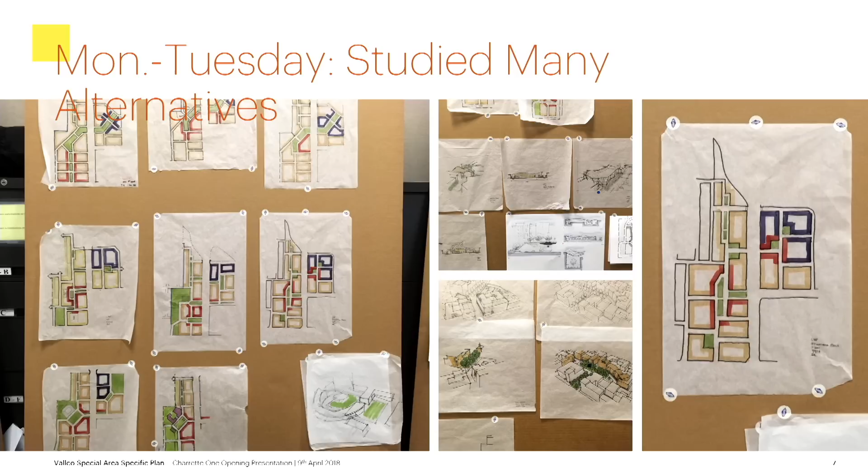Monday evening from 6 to 7:30, we started with the kickoff presentation and the breakouts. On Monday and Tuesday, if you dropped by the studio, you saw the team rolling up their sleeves, putting pencil to paper. We generated dozens of framework alternatives, different types of public spaces, a number of drawings just to get ideas down on paper and to get the team thinking, and to have some ideas for you all to react to as you walked through the design studio.

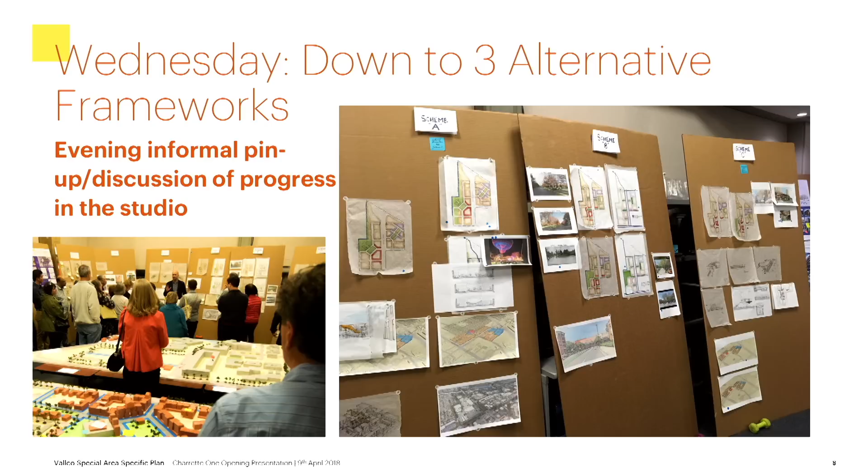Then on Wednesday at 6 o'clock, the team had whittled down those dozens of concepts to 3 different alternatives. For those who attended that Wednesday pinup session in the studio, we walked the audience through those 3 alternatives and their different elements. The studio was a little bit tight - the model takes up a good chunk of the studio - but it was a really good dialogue on Wednesday, and we got some really good feedback once again.

Mentioned the topic-specific deep dives, or the brown bag lunches. Ben Sigmund did the Tuesday brown bag on economics, and Steve Lawton was there to talk more about retail. Hugh Louch from Alta Planning did the transportation brown bag on Wednesday, and Tony Perez from Opticos did the form-based code presentation on Thursday. I believe all of those have been uploaded onto the project website - I've actually seen them playing in the vestibule on the TV over the last several days.

So I do encourage you to take a look at those if you haven't already. Then there's the open studio conversations, and I think this is one of the real benefits of the charrette process - we bring our team here, set up our design studio, bring our computers and drawing utensils, and it's a really active, vibrant, energetic environment. It enables us to make really good progress over a few days and interact with you, getting more feedback loops, and interact with our multidisciplinary team and get feedback loops completed with them as well over the course of the week.

Every day we uploaded quite a bit of content onto the project website. If you're signed up for the email, I noticed I was getting that every morning, looking through that list of stuff - I think that was great to see. I know there were some comments early on that the website was a little bit stale in terms of content, so I'd say there's probably plenty of content on there to keep you busy for a few weeks, until we get to that next charrette, or at least start thinking more specifically about that.

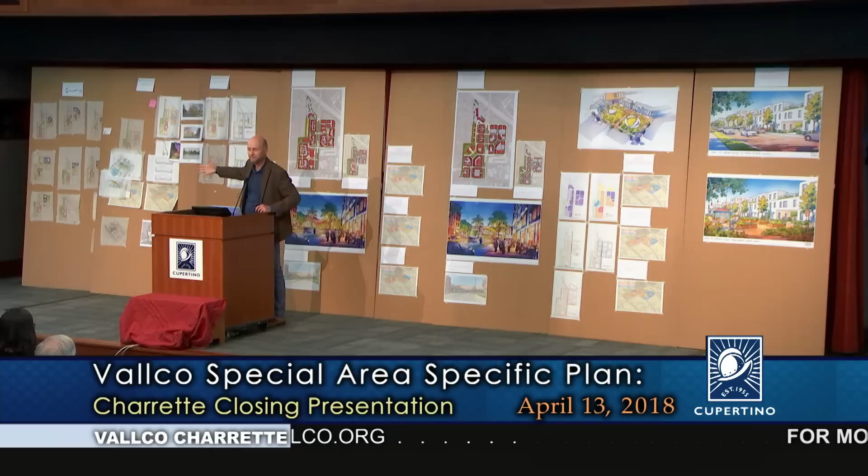Behind me to your left is somewhat of a chronological process that happened in the studio, with the rougher plan drawings on trace paper where you might see several layers taped on one another that we integrated over the course of the week. The boards here with the brightly colored drawings are the ones we've generated in the last day and a half to clearly represent the two different alternatives I'll talk with you about tonight.

The first concept is a pretty basic one: making the streets more pedestrian and bicycle friendly. That's shared across the two schemes. It's a pretty basic concept, but I wanted to continue to reinforce it, since we heard a lot about the importance of connectivity, walkability, and bikeability.

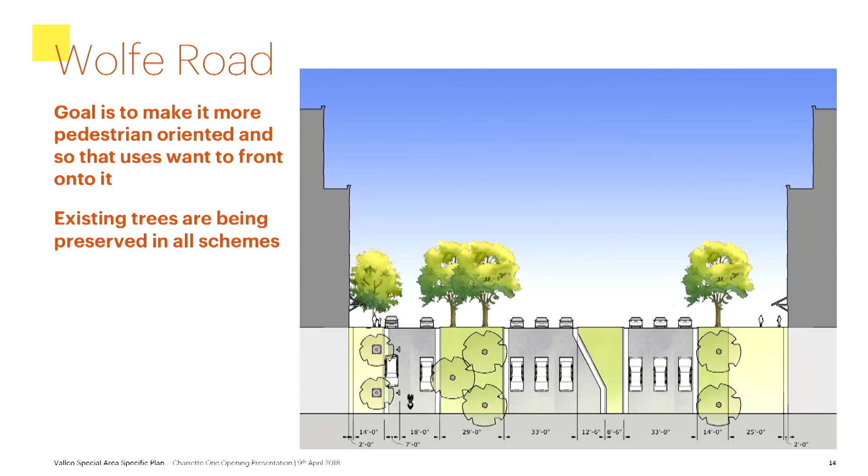Just as one example, we're looking at Wolfe Road and thinking about how to make it a much more inviting street to walk along—how do you make it the type of street a business would actually want to front onto, as opposed to back onto? If you've been to Santana Row, everything's really internalized; they gave up on the outside streets and turned their backs to them. We think it's a much better idea to create a gateway and an identity for the project that orients onto those external streets as well.

One idea is to introduce a local travel lane on the western side, similar to cities with multi-way boulevards like Paris or Barcelona, or Octavia Boulevard in San Francisco where they tore down the freeway. It has that local travel lane while still having through traffic going in the middle—a great way to create a beautiful street that people will walk along and businesses want to orient on, without impacting the flow of traffic through the area.

The second key concept is very thoughtful transitions into the neighborhoods. This is something we've heard over the course of this project, and it's important for the neighborhoods in particular. I want to say there's absolutely no intent in this process to take the wall down unless that's something the community really supports and pushes for.

We're also protecting those rows of trees along that edge. I'm hoping that if that's not done initially, such a great place is developed here that you all think twice about wanting that punched opening through there to enable walking to the great amenities in this project area. We've heard varying viewpoints, but right now we're just saying let's let the community decide what they want to do with that.

This is just a view, and you'll see this when you go take a look at the model in the studio. The idea is that there's a very careful and thoughtful transition from the biggest buildings, mostly at the northeast corner, scaling down as you move across the site to basically the west and southwest.

The majority of our schemes, if not all of them, have 3 to 4 stories at that immediate western edge, and we can still achieve the program by scaling up the buildings as you progress away from that neighborhood. This is a view of that scale of development—the residential, new housing closest to the Blaney neighborhood.

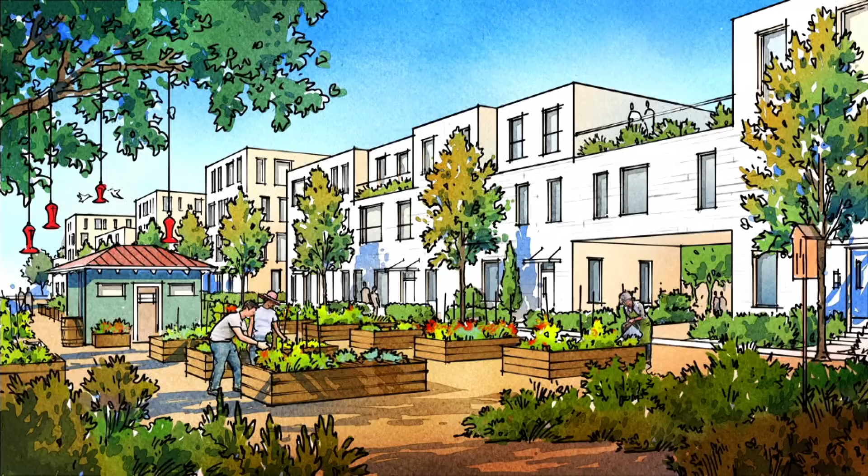That's a view with housing fronting onto the perimeter road. There are some alternatives where the houses bump right up to where the current perimeter road goes, and another set of alternatives where the housing orients onto a larger green open space. This is a conversation we need to continue—one trade-off for more at-grade open space is that we'll likely need to bump up buildings at some other part of the project in exchange for that area becoming open space. That's a good dialogue for us to have as we work through this process.

There's a series of programmatic elements. I don't want to sound like a broken record, but I want to reinforce that there are things the community said we absolutely want that are existing—the skating rink, the bowling alleys, and a movie theater—that have been a constant theme here. So we're integrating those uses.

A lot of this will involve back and forth between now and the second charrette, at the second charrette, and after it, with our team working with the Sand Hill team to figure out viability and the community's desires, and you all prioritizing which of the benefits you'd like to exchange for elements within the plan.

Some creative thoughts that have come up over the course of the week: several people brought up the idea of how does co-housing integrate into the project area. That's where you might have a shared courtyard with a group of friends, purchasing a series of housing units with shared space, maybe a shared kitchen, maybe ultimately shared medical care. We're not thinking that carefully about program right now, but those are ideas we'd like to continue moving forward with.

This percentage of affordable housing - 50% of the housing in the SB 35 scheme would be affordable at different levels. That's actually a pretty neat thing, to have 50% of housing affordable.

Where will the affordability dial land as there's back and forth in thinking about overall program and public amenities? That's going to be talked about very closely and carefully, quite often, over the remainder of this process. Several people asked what about affordability for groups that haven't been discussed to date? I think it's really affordability in a broad spectrum, from the upper level to the most lower levels. We'll continue talking about that.

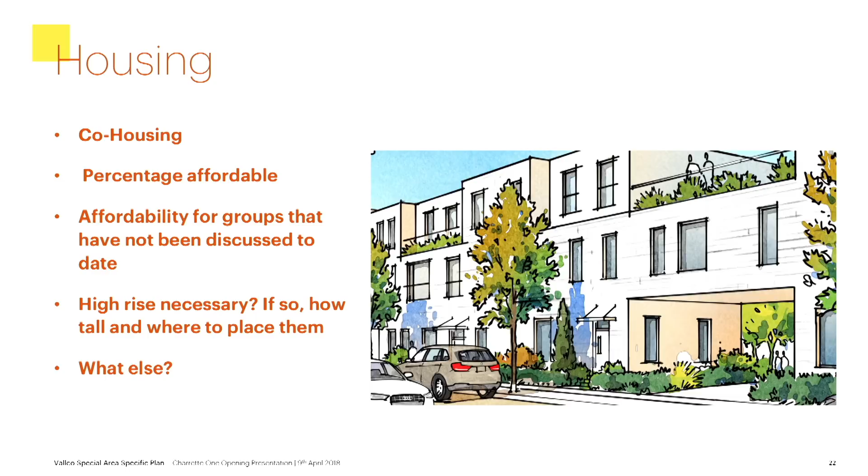The high-rise housing - I think it makes people a little bit anxious. It's something new for your community. If the SB 35 proposal is showing multiple high-rise residential towers, the ultimate question is going to be whether they're happening, but probably more so where they're happening, and a back and forth of public amenity versus size versus location versus the number of them.

So I want to put that on the table. There's no decisions being made. I want to be really open and transparent that the high-rise residential towers are on the table, being discussed, and likely part of that program. There are other things too - I'm sure we've missed some, but we're going to keep thinking about this, and we want you to keep giving us thoughts about it.

Other ideas we'll continue thinking about: multiple entities, community members, and organizations have brought up the idea of an innovation center or innovation hub. Everything from elementary schools, middle schools, high schools, colleges, universities, and businesses in the city could play a very active role in thinking about how we take advantage of the really smart kids here, the great school programs already focusing on these innovation ideas, and ideally pull in local businesses that can support that and play a really important part.

So the first of the alternatives is what we're just calling Internal Square. We kept the names really basic, we just want them to be what they are. So if you were in the studio, this is an early concept drawing with three different layers of trace paper, where the activity for your new town center is focused on an internal square in a more traditional urban pattern. You can imagine a Sonoma Square, a Napa Square, a really more traditional form.

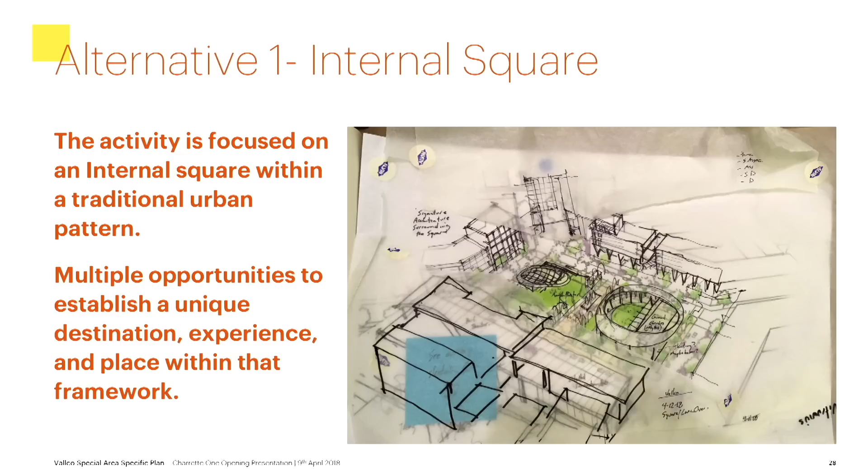But we wanted to also think about within that framework, there's a ton of opportunities, whether it be in the architecture of the buildings or the architectural elements that happen in the square, that could help move that framework and concept forward to a more innovative differentiator. Because if you remember what Steve Lawton said at the retail brown bag, one of the most important aspects of retail is differentiating yourself from the competition. So that's an important part.

I know it's going to be a little hard for you to see these, but on the left-hand slide, the street that goes vertical there is Wolfe Road, and it's Vallco Parkway splitting halfway there. There's a public square at a diagonal. The building on your upper right, at that diagonal, we've heard a lot about - is there an opportunity to integrate a new city hall? Is there an opportunity to integrate a new performing arts theater? So we took that program and said this is one great opportunity to define that upper edge of this new public square, and the other edges would be defined by ground floor retail that would activate the space.

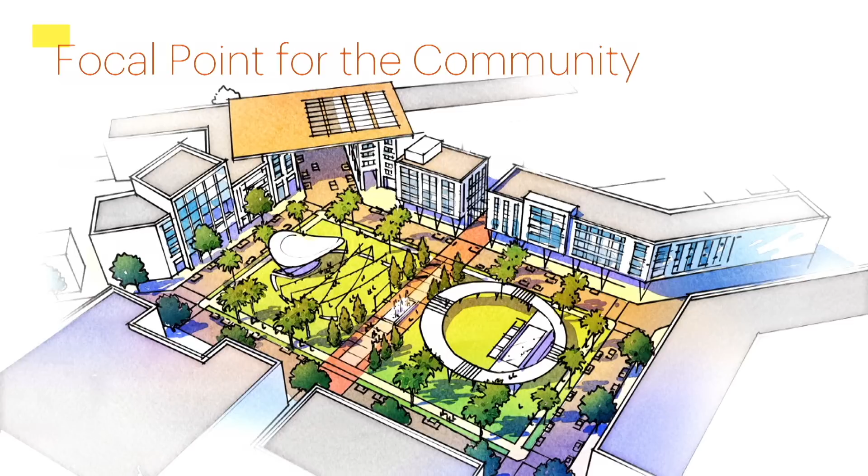This is just a quick aerial view. It's actually a pretty substantial space, so it could be programmed in many different ways based on what the community wants. On your right-hand side, there's a representation of a band shell, and there could be a large outdoor amphitheater that could be programmed as often as possible to activate that new space.

On your left-hand side is just a simple representation of a really well-designed, cutting-edge landscape pavilion. There could be space in there that hosts the Innovation Center, there could be gallery space, there could be council chambers in there as an object - sorry, on the right-hand side, I apologize, I'm flipped around here. So that circle, the big circle, with a little rectangle in it.

What you'll see on the upper portion of this are just the placeholders for that potential city hall and that potential performing arts center. We've looked at several performing arts centers - there's a great one in Mountain View, there's a great one in Livermore. We don't know how big this will be yet; the Livermore one's about 500 people, and I think the Mountain View one holds about 600, if I'm correct. But it could be a little bit bigger as this progresses. Not sure yet, we need to think about that. We studied these spaces, their sizes, and the quality.

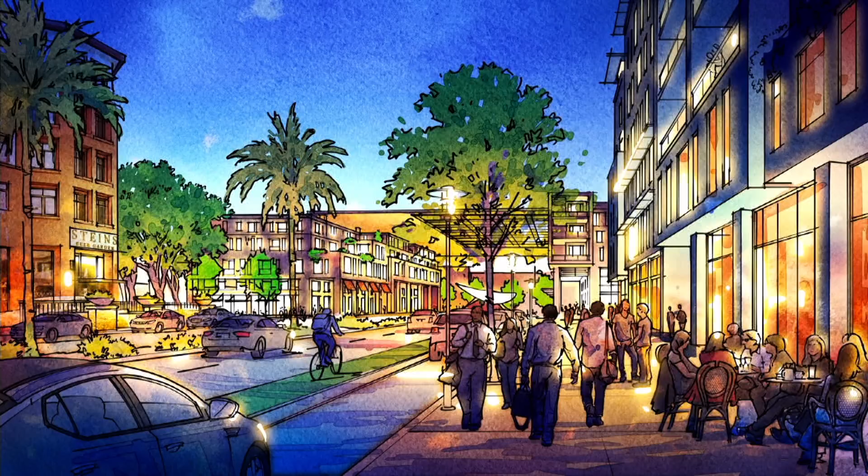Okay, so this is a view looking down Vallco Parkway. Currently, in the existing scheme, you'd be standing on the side of the street that has the parking garage on your right-hand side, and the AMC Theater building would be terminating this view. So the idea here is that we're creating a strong connection by activating this corner of Vallco Parkway with ground floor retail.

And if you cross that street, if you keep going straight across Wolfe Road, there's some sort of signature architectural element that draws you off of Wolfe Road into the new town square, or public square space. So this is just giving you a sense of scale and character, what that could potentially look and feel like.

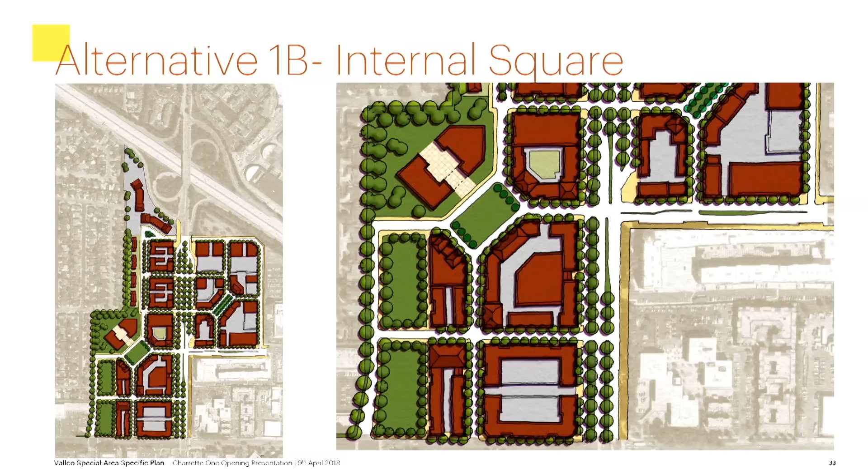Then there's a subset within this scheme which says on the left, the western edge of this project, we're introducing a large linear green space. This is what I mentioned earlier, just saying what if, because we wanted to study that scenario. The rest of the scheme stays exactly the same, just a different interface with that introduction of open space on the western edge.

So we've had questions about program. We have been hastily, over the course of the last day and a half, putting building footprints into those street and block frameworks, and have generated several program alternatives within those frameworks.

Now, once again, this is a work in progress. We're going to study many more of these. But this was our first pass at getting some numbers out there and showing that we could, as a starting point, accommodate a program equivalent to the SB 35 program within this street and block network we're proposing in these two schemes. So that was the starting point.

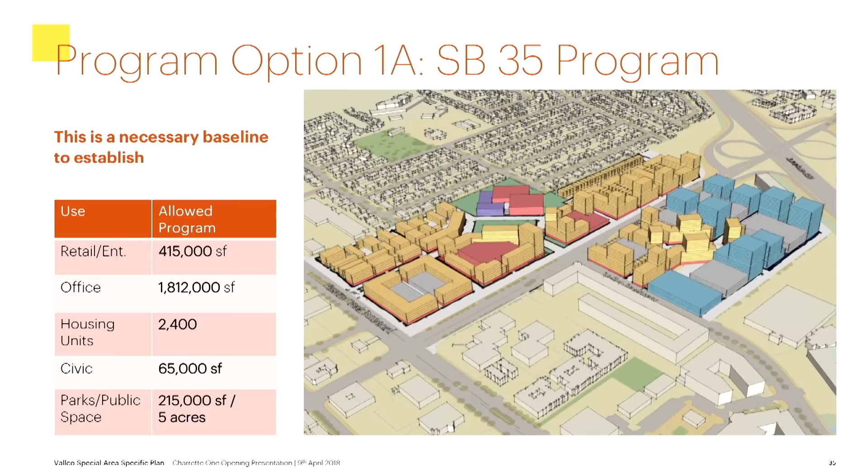The second alternative we did for each of these different frameworks was lowering the office space in the project. The retail program stayed the same, but the office program came down to about 1.3 million square feet. The residential is staying the same, but the affordability requirement percentage is coming down. Those are the sorts of numbers we'll have to work out with EPS and Sand Hill over the course of this project, to understand where those will land in terms of percentages and even the breakdown of that affordable housing.

Civic stayed the same. And once again, this is about 5 acres of provided open space, so there'd have to be a payment of an in-lieu fee to mitigate, to fill the gap between the required open space and the provided open space.

So in the scheme we're calling 1B, which introduces that western green, it's once again at the SB 35 program level. We're showing this because the program stays the same, but when you look more carefully at the massing, there's more height on a series of the buildings because we took it off of the green. I'll encourage you to take a close look at these and ask us questions about it.

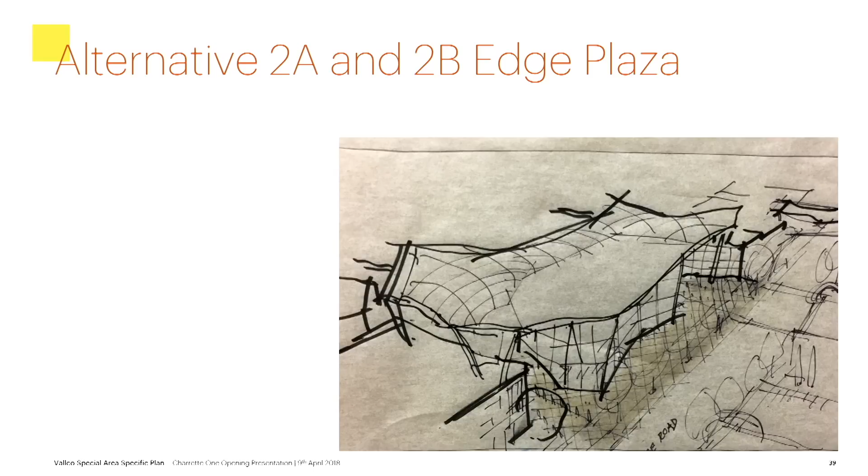So the second alternative we moved forward with, we're calling this the Edge Plaza. This was an early sketch of it, thinking about right along Wolfe Road where Vallco Parkway meets it - some large, we're calling it a retail pavilion, some signature entertainment retail building that's solely retail and entertainment, very iconic, that becomes the core component of the retail entertainment part of the project.

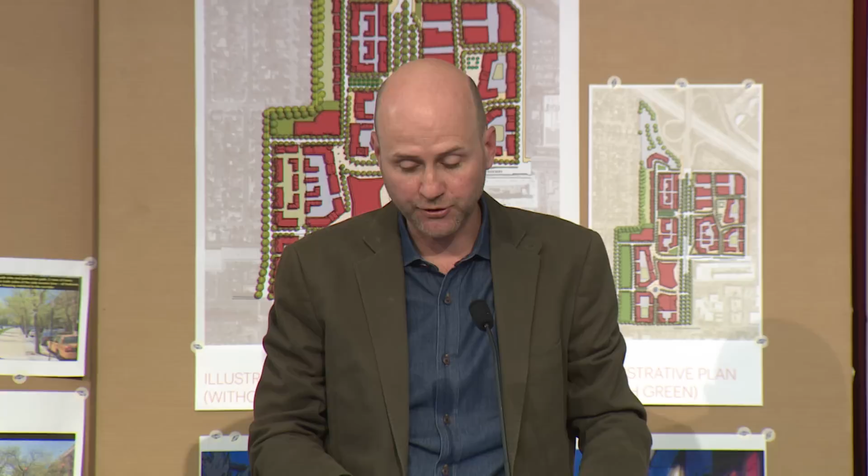This sort of signature retail pavilion could be achieved. I want to be clear that we're not designing that - we're defining a program, defining a direction. Ultimately the property owner would work with their architect to do the actual development plan and design that building, but we're defining the parameters for that concept.

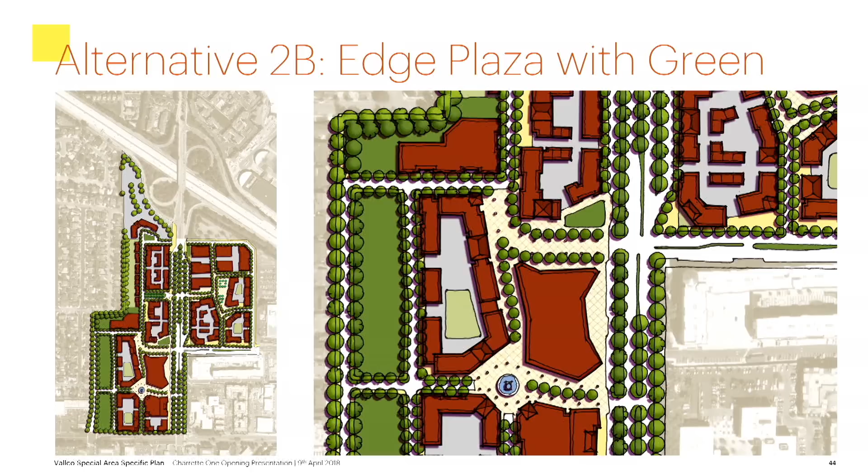Once again, we have the alternative with the western green on this scheme as well. I want to mention, if you look straight down this sidewalk, we've introduced a taller building there. That's a pretty logical location for a taller residential building in the scheme where you have that large western green, so we wanted to introduce that and have a conversation about it.

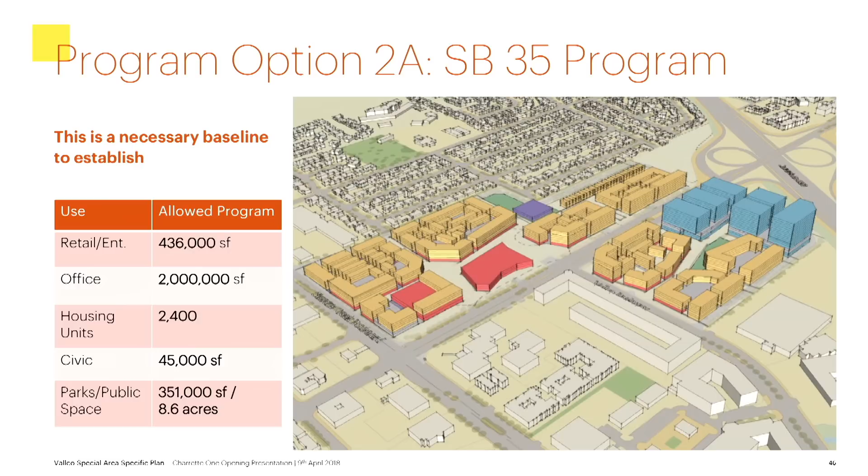So once again we took those schemes, took a first quick pass at integrating that program into them. We started with that SB35 number as a starting point: a little under 500,000 square feet of entertainment and retail, about 2 million of office - I think we'd come down on that a little bit - 2,400 housing units, a little under 50,000 of civic space, and this one has about 8.6 acres of public space, so it's a little short of the 13 required. We'd need to figure out a way to make that up.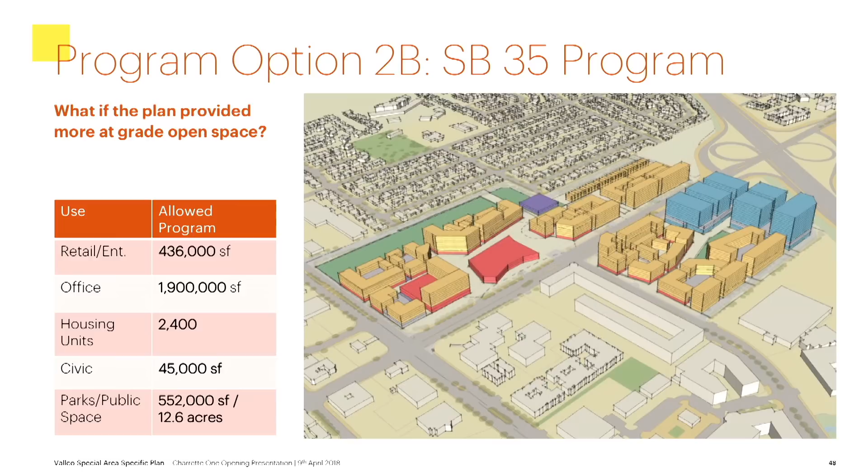Then lowering the office to just a little under 1.3, retail stays about the same at about 436,000, 2,400 units, 45,000 of civic space, and the 8.6 acres of open space. I'll just leave it there - it gets a little repetitive with the two because we followed a similar approach for each of the different schemes, but we're happy to talk about these in detail at the boards.

In terms of next steps, we know these alternatives need to be very carefully assessed. That's really the primary reason we moved forward with a two-stage charrette process - we got to a milestone, take these back and have Ben and Hugh take them back to their studios and assess them for transportation impacts, how we start thinking about transportation demand management strategies. Ben starts sharpening the pencils with his Excel spreadsheet and thinks about the program mix and viability. We have conversations with the property owners and the city, and bring that information back to you all so we can do another round.

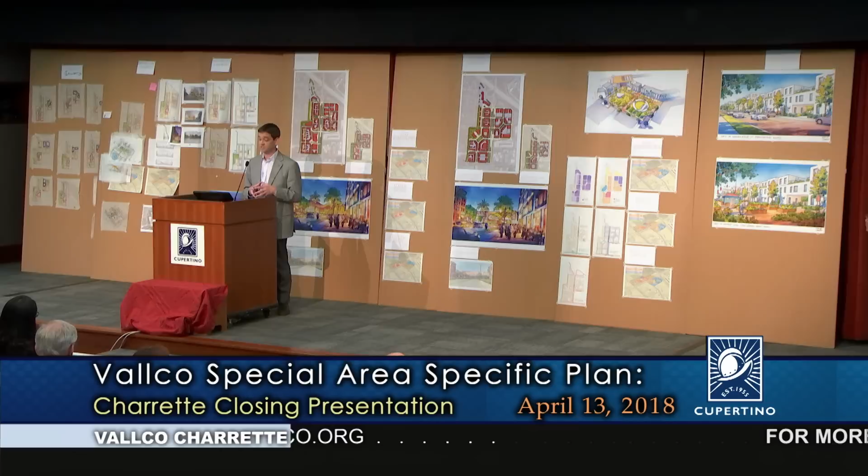There are different strategies and approaches, including land use strategies. The mixed use approach being used here has benefits in reducing certain kinds of trips. Then there's parking, the relationship between parking cost, supply, and how much people travel by single occupant vehicle, and other incentive-based strategies like support for transit, biking and walking. There's a pretty wide range of what's possible, but now we get to start narrowing in on what that means.

If we're talking about the most basic strategies for a program like this, we're probably looking at a small percentage reduction, maybe 5 to 10%. As we build in parking strategies, we get a more substantial potential reduction, into the 25 to 30% range in trips. We'll take all that work and assemble what we think is the best package of investments matching each scenario, which we'll share with you in the second charrette.

So other than that, I think that's all I wanted to say.

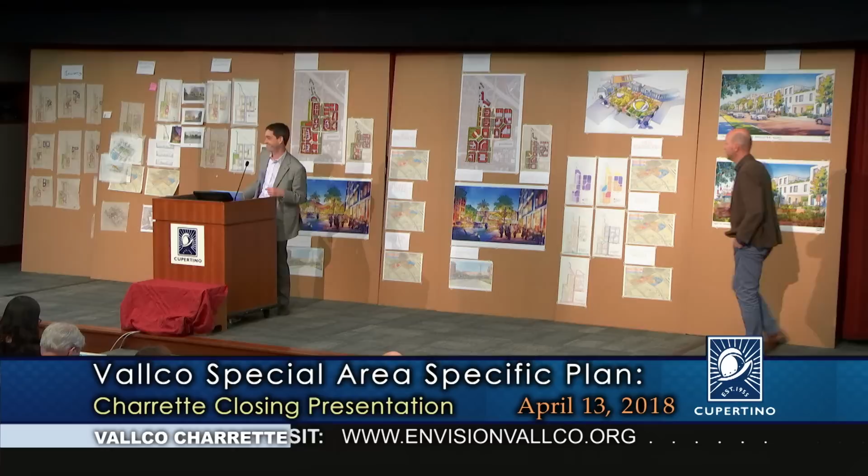The idea here is we've had a couple of feedback loops from you before the charrette, and we've done several feedback loops at this charrette. We're still digesting. We had hundreds of Post-it notes on the photo boards, lots of blue dots on photos people liked. Aaron and Bill did a great job starting to digest that information. There was a lot, and we'll continue digesting it and let that inform us as we come into the second charrette.

It's 5 weeks from now, so it's going to come upon us pretty quickly. But I appreciate you coming tonight.

We're going to shift our— oh yes, sorry, I need to tell one more thing. Okay, website. Oh yes, okay.

Two things: one is the dates are wrong, because it's before Memorial Day, and the 25th is a Friday before Memorial Day, so we don't think that's a good idea. So it's going to be the 20th through the 24th. That'll be corrected on the website.